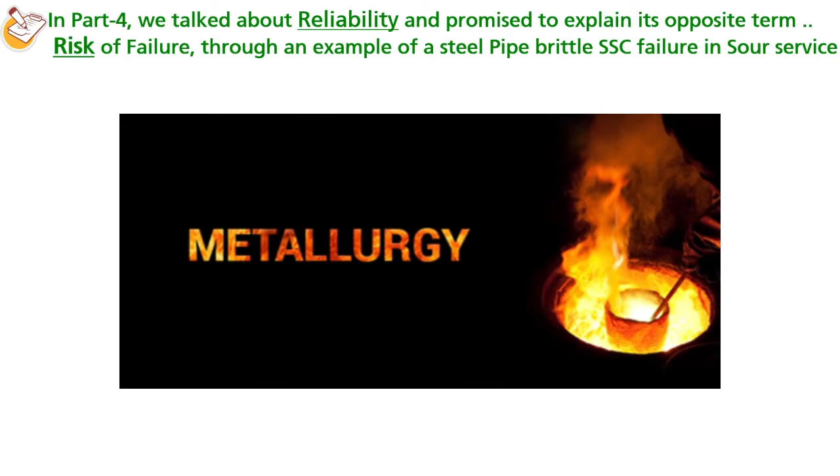But before we talk about such risk of SSC failure and explain risk in general, which is the main topic of this part, and since I promised to explain such a specific metallurgical failure risk in oil and gas industry, let me first explain some metallurgical terms. So what is brittle failure? What is sulfide stress cracking failure? And what is sour service?

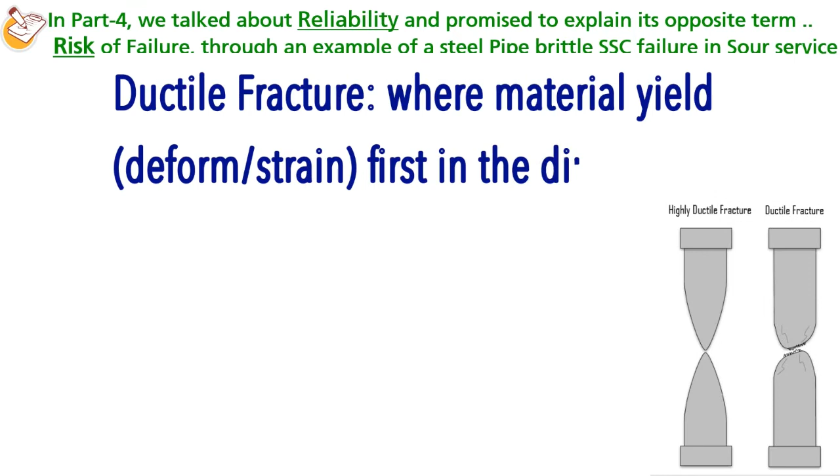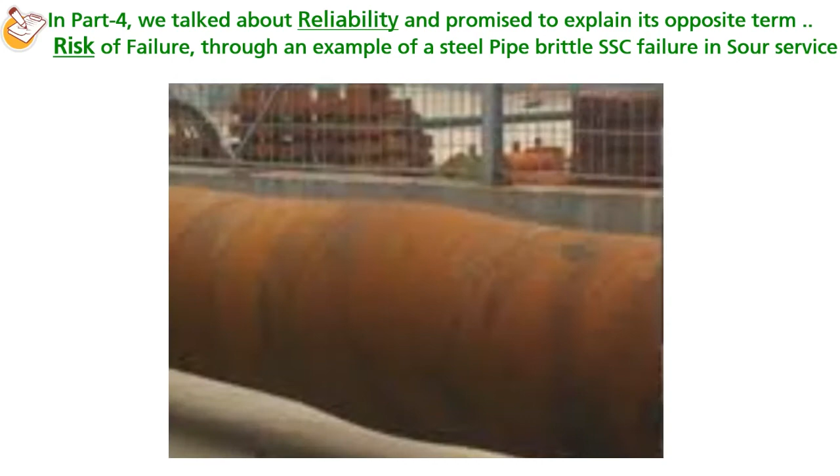Failures in most engineering steels can be either a ductile fracture, where material yields and deforms, straining first in the direction of the applied stress before complete breakage, giving a clear warning sign of plastic permanent deformation, like pipe bulging during a hydro test or steel bridge bending due to excess loads before complete rupture, which only happens after exceeding the ultimate tensile strength of the material, resulting in complete failure.

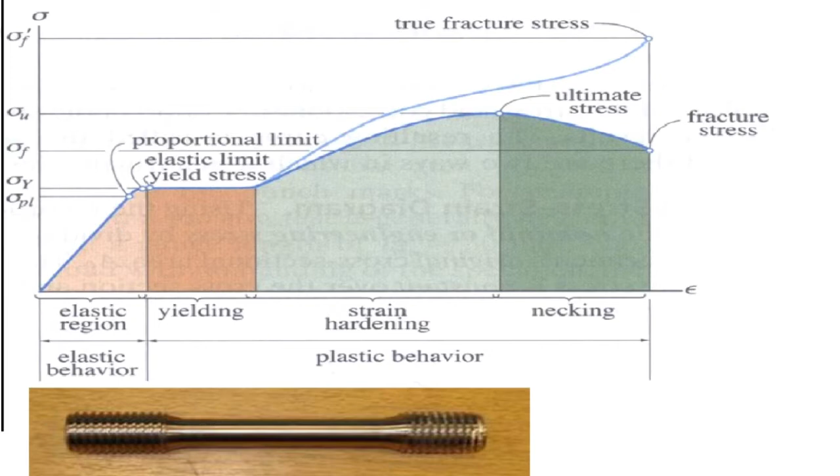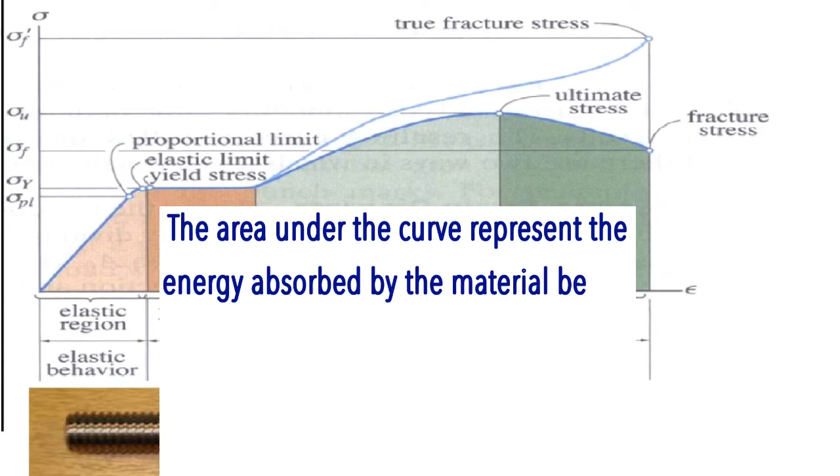This is expressed in the famous engineering stress strain curve, where the area under the curve of the plastic deformation part represents the energy absorbed by the material before failure, called toughness, an important property when we talk about brittle fracture, since brittle materials absorb least energy before failure or fracture.

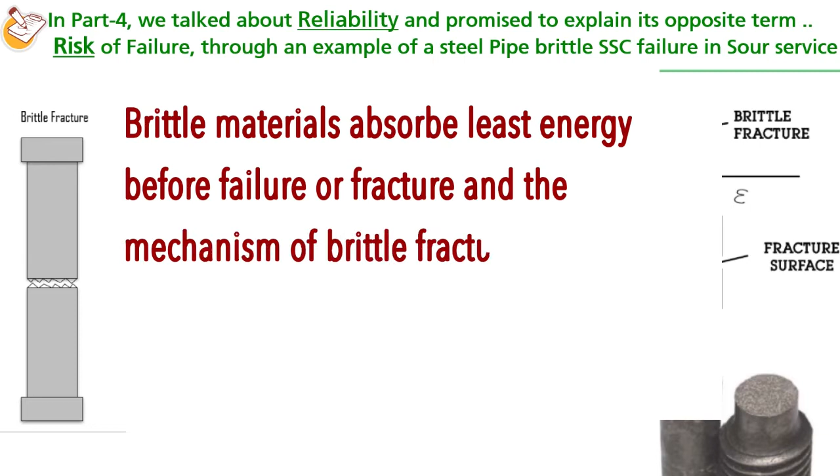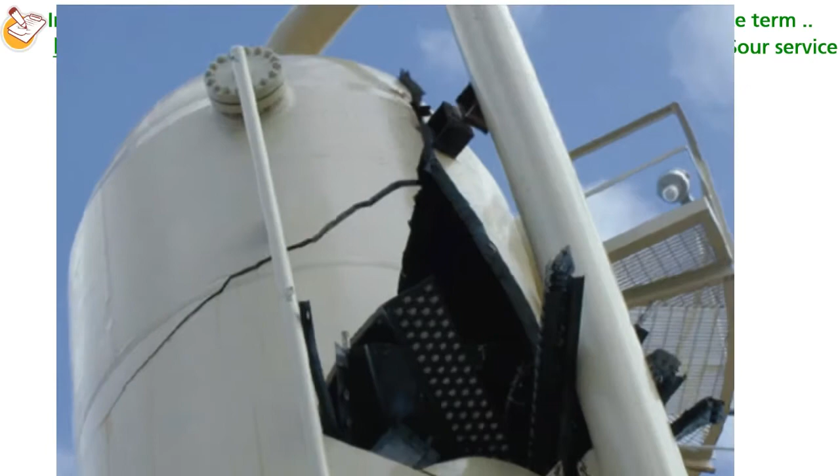The mechanism of brittle fracture is always associated with sudden breakage and fracture at lower stress level than normal ones, and this sudden nature of the failure, without any visible warning signs of deformation, results in losing the chance to do any preventive actions to avoid the failure and its catastrophic consequences.

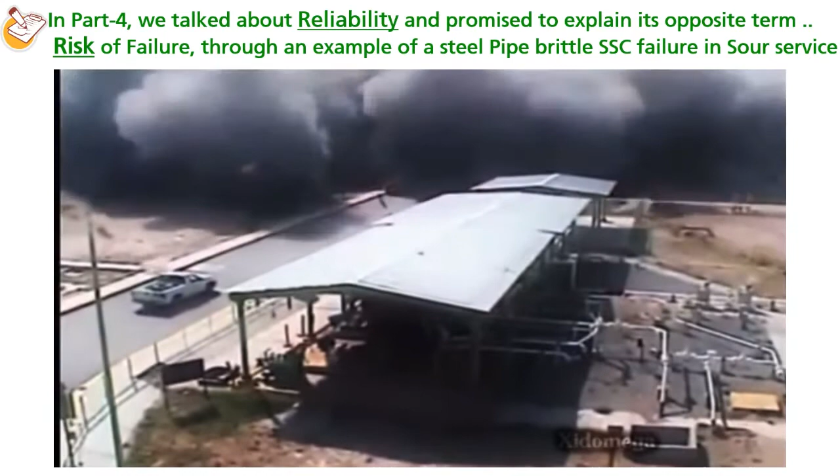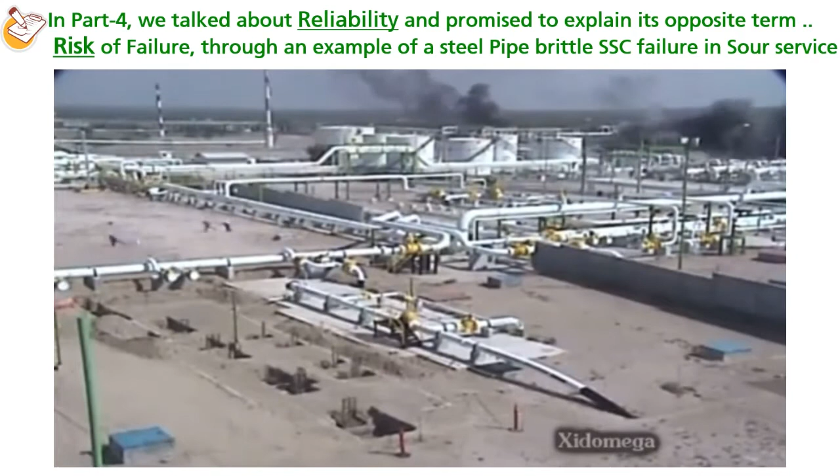Just to know the impact of brittle fractures: in 2007 in China only, 257 cases of accidents of special equipment occurred, which caused 325 deaths and 285 injuries, and more than half of these accidents were caused by brittle fracture.

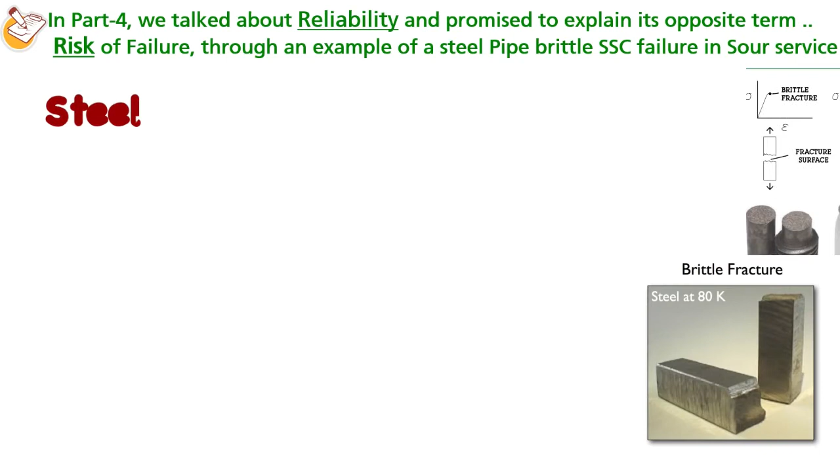But what can make material fail in such a brittle mode? Well, some causes can be that the material itself has problems, like high sulfur, high phosphorus levels, and might have high oxide levels, like in some old steels that were semi-killed steels, meaning not fully deoxidized to remove such oxides.

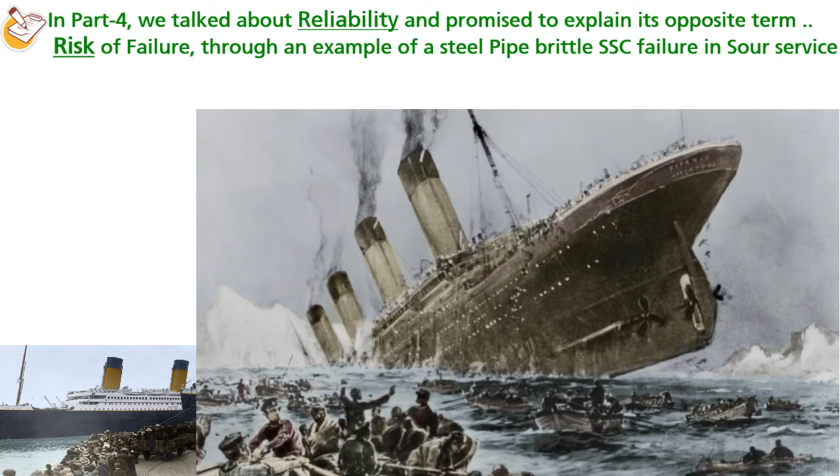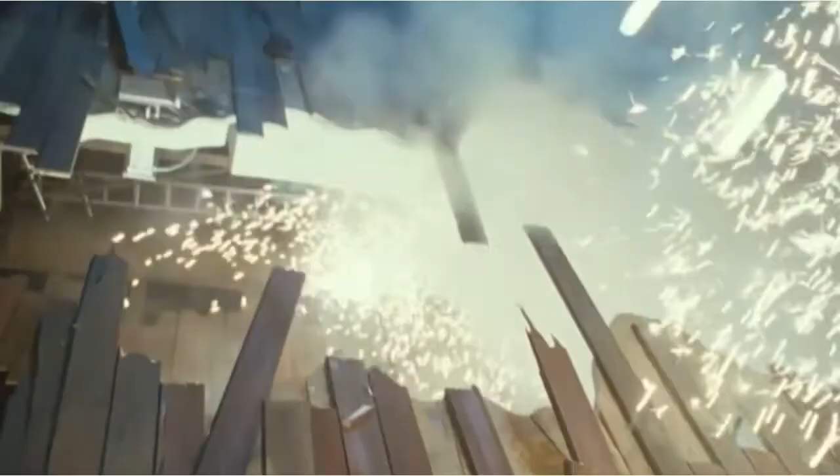The most famous disaster from brittle fracture due to this type of steel, combined with low temperature and impact load, is the famous 46,000-ton Titanic steamship disaster in 1912, with 2,227 passengers and crew aboard, where complete brittle fracture took place in the hull after striking the iceberg at high speed with its side. It was after this collision the disaster started, where the very low water temperature increased the steel brittleness.

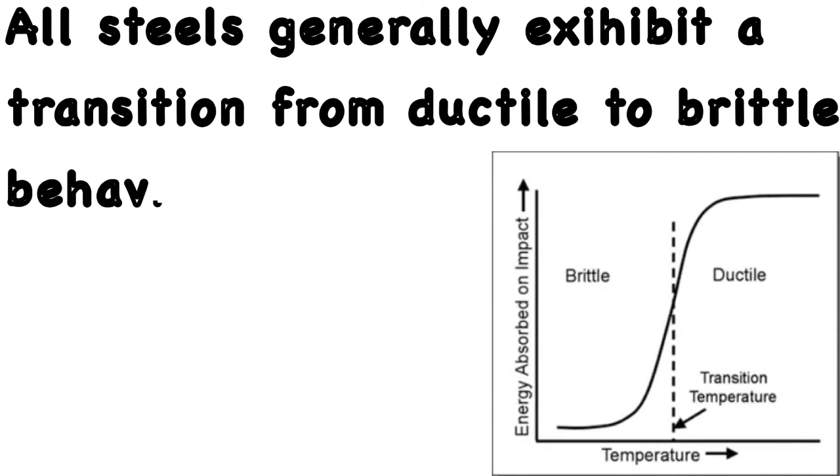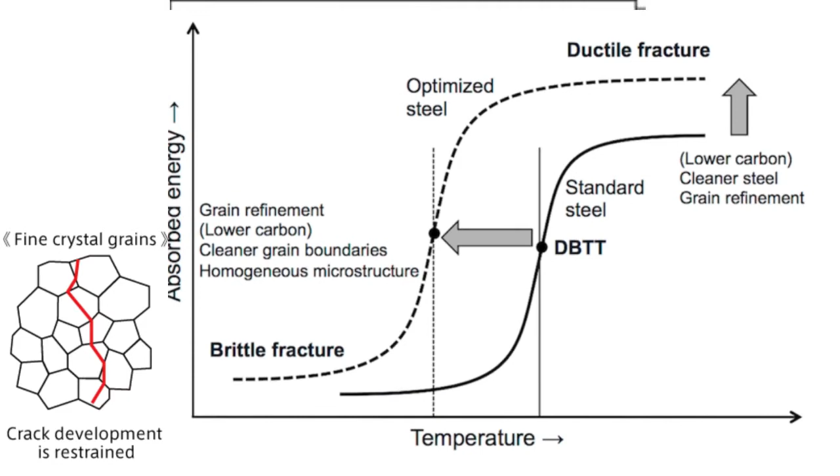All steels generally exhibit a transition from ductile to brittle behavior at a certain low temperature, DBTT, where fracture behavior follows a sudden cleavage mode. For modern fine-grained tough steels, DBTT, ductile brittle transition temperature, can go down to minus 100 degrees centigrade. But what is fine-grained steel, and why is it tough steel that can resist cracking and failure at such low temperature and impact load?

In order to answer this question, I need to give a brief and general explanation of some physical metallurgy basics. I apologize for the complexity this can generate for non-metallurgists. I'll try to simplify as much as possible.

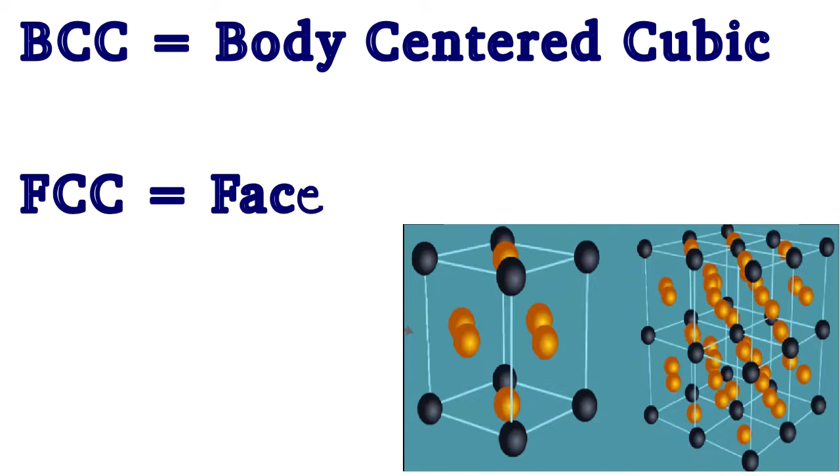Steel is mainly an alloy of iron and carbon, and when it solidifies or crystallizes, its atoms arrange themselves in a unique symmetrical crystalline structure, BCC body-centered cubic or FCC face-centered cubic, referred to as steel's allotropic form.

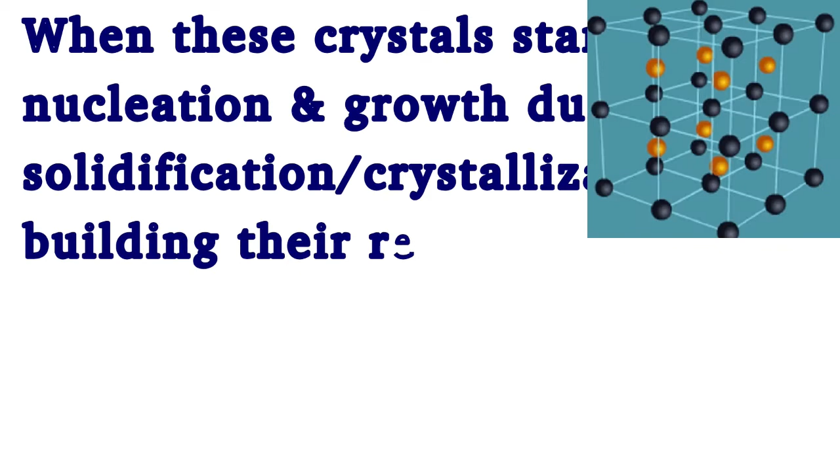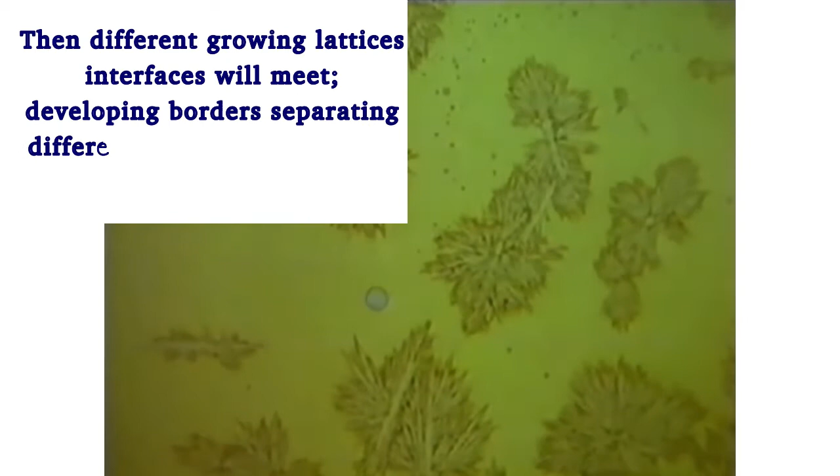When these crystals start nucleation and growth during solidification and crystallization, building their repeated symmetrical unit cells, called lattice, growing in all directions, different growing lattices interfaces will meet, developing a border separating different growing lattices and stopping further growth. So these crystallized lattices are grains, and the separating borders between them are grain boundaries.

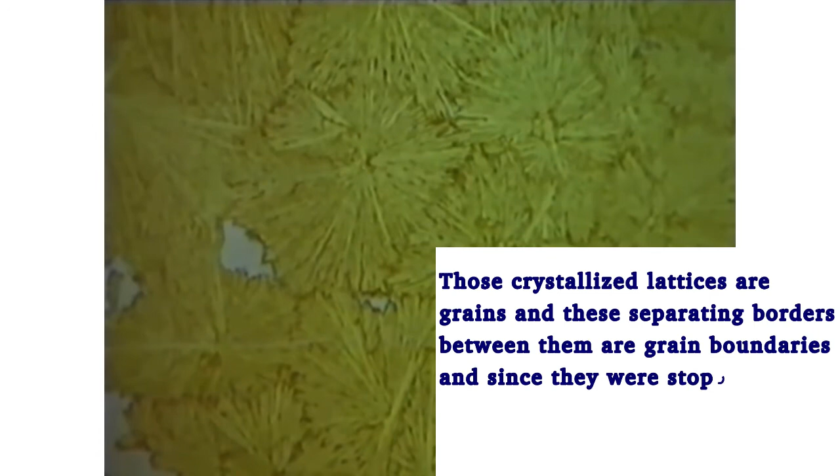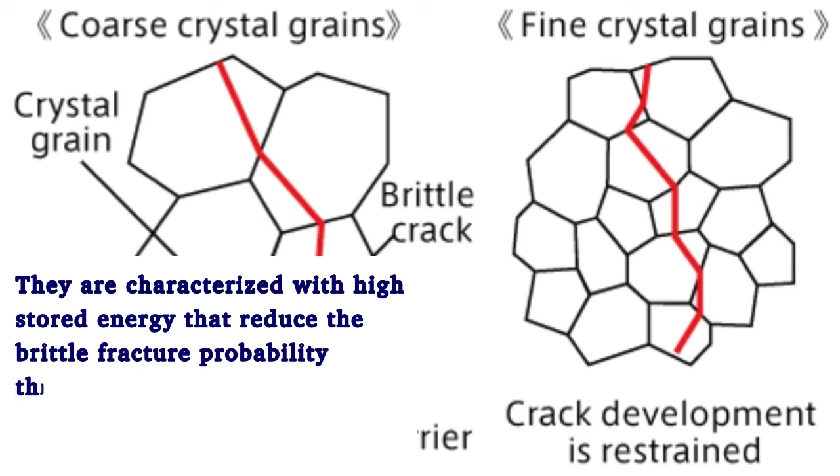Since they were stopped against certain growing force inertia, they are usually stronger than grains and characterized with high stored energy. That reduces the brittle fracture probability through resisting dislocation movement and crack propagation at low and normal temperature.

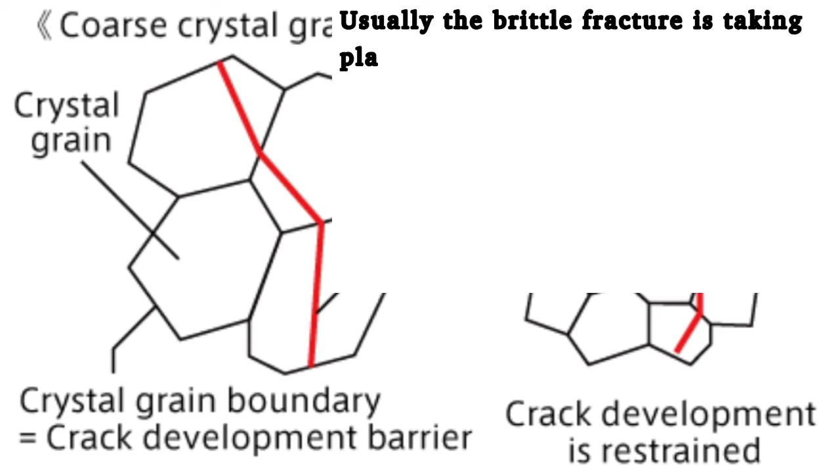So usually brittle fracture takes place in brittle materials by fine crack propagation through the grains themselves, called transgranular cracking, taking place suddenly and rapidly through separation across well-defined crystallographic planes.

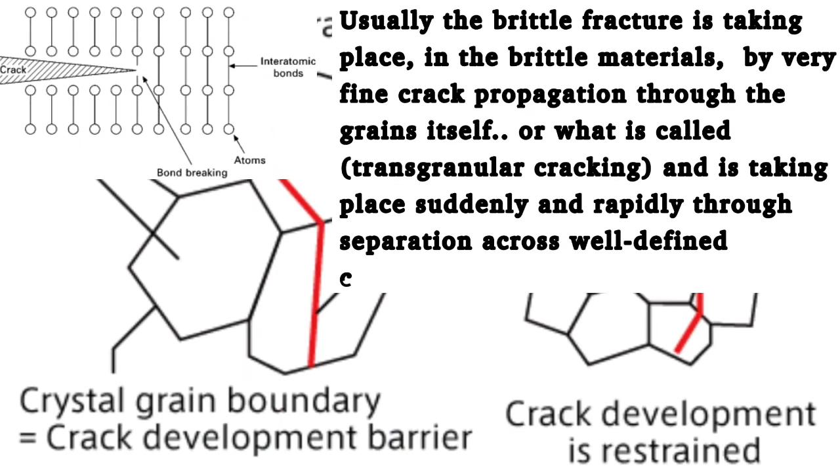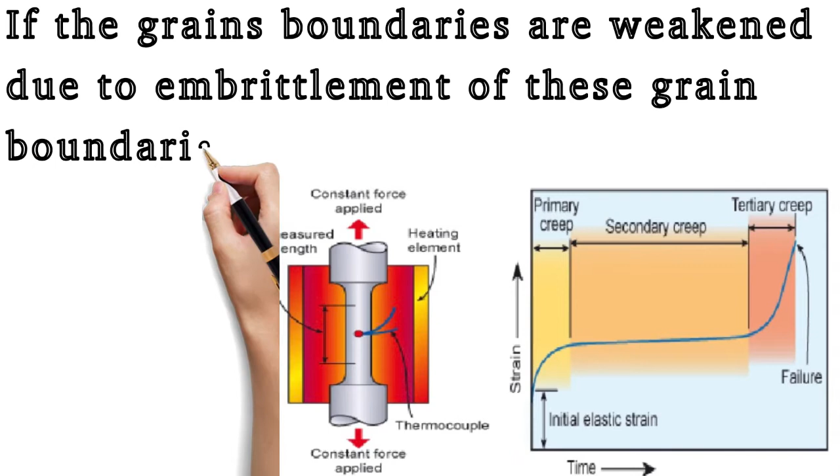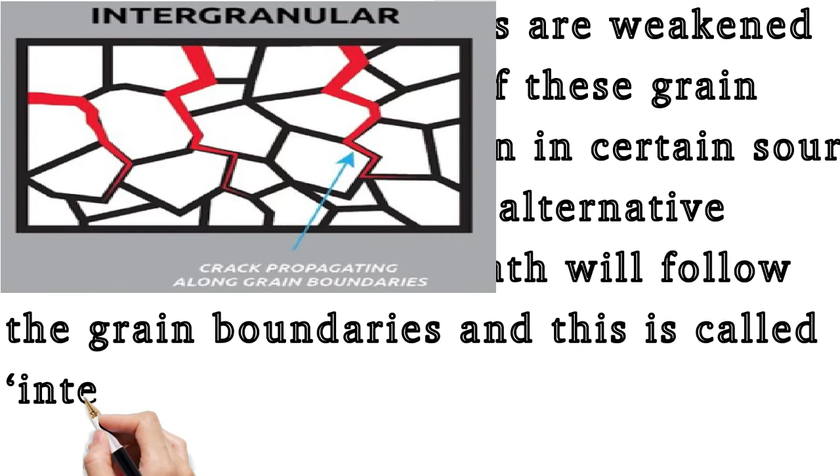However, if the grain boundaries are weakened, like in case of working above a certain high temperature called creep temperature, or in case of embrittlement of these grain boundaries by hydrogen in certain sour service conditions, the alternative fracture propagation path will follow the grain boundaries. This is called intergranular fracture, and this is a typical mechanism of sulfide stress cracking failure.

But how can we evaluate the risk that a high-strength low-alloy steel pipe will fail with the SSC mechanism in a sour service condition? And what is actually meant by sour service?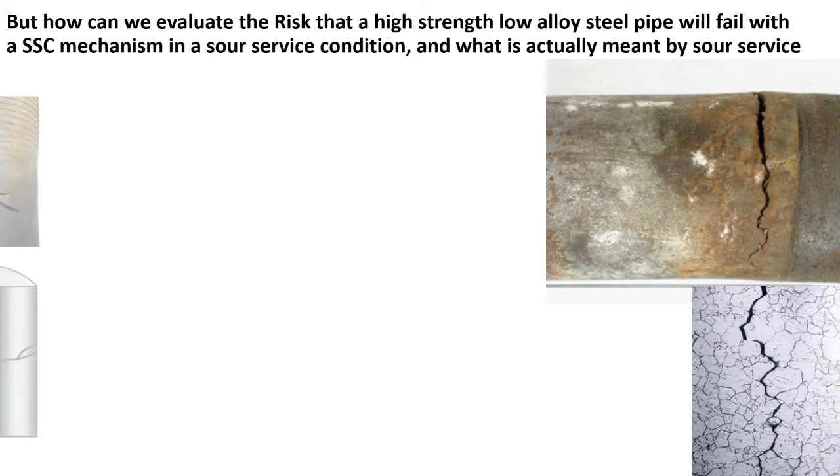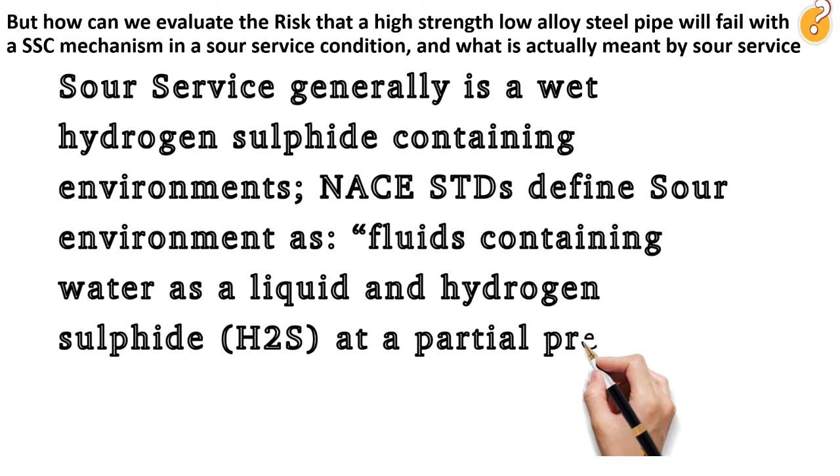Now, sour service generally is a wet hydrogen sulfide containing environment. NACE standards define sour environment as fluids containing water as a liquid and hydrogen sulfide at a partial pressure above 0.05 psi, which may cause sulfide stress cracking of some steels. From a health hazard and risk point of view, we should know that H2S gas is a highly toxic gas and can be fatal at certain exposure levels.

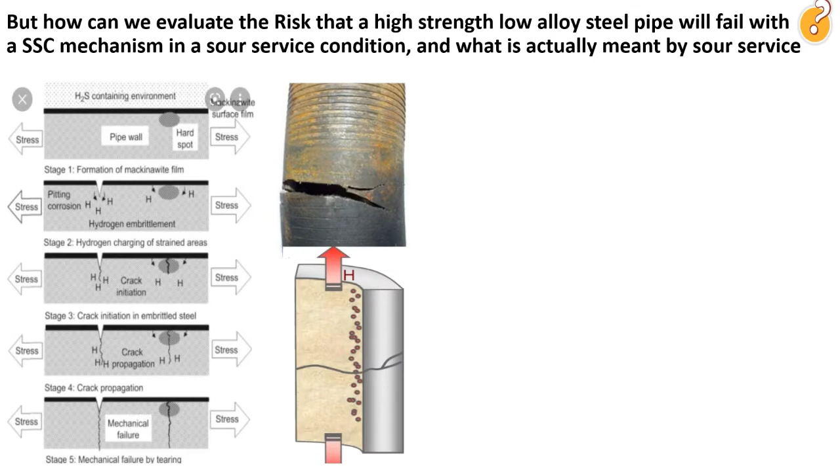H2S is also very detrimental to high-strength steels and can cause initiation of cracks at the steel surface, mainly through a hydrogen embrittlement mechanism, when it exists in a certain humid hydrogen sulfide environment, especially if combined with certain stress loads. This is why it is called sulfide stress cracking.

SSC is a catastrophic failure as it results in a brittle fracture, and it can occur at stresses falling within the range of typical design stress.

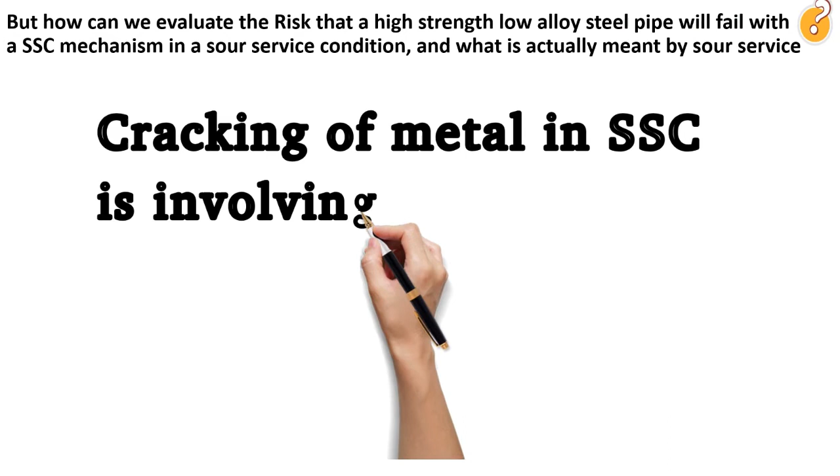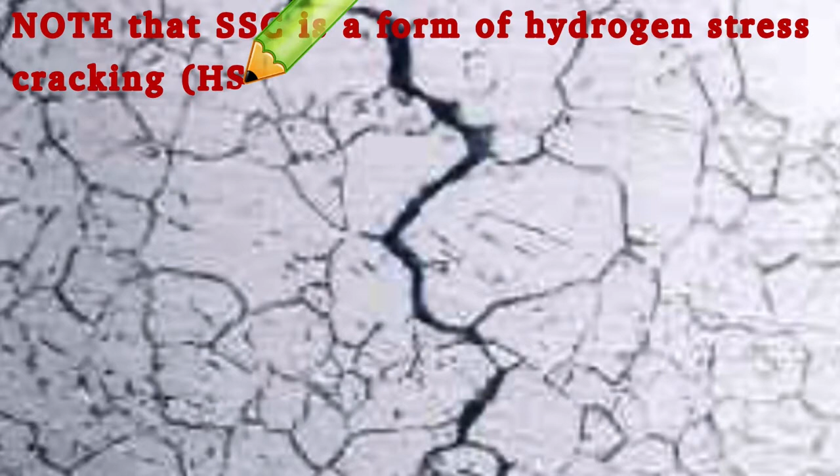As per standards covering these types of services, like NACE MR0175 and ISO 15156, cracking of metal in SSC involves corrosion and tensile stress, residual and/or applied, in the presence of water and H2S. Note that SSC is a form of hydrogen stress cracking, HSC, and involves embrittlement of the metal by atomic hydrogen produced by acid corrosion on the metal surface promoted by the presence of sulfides. The atomic hydrogen can diffuse into the metal, reduce ductility, and increase susceptibility to cracking, especially in high-strength metallic materials.

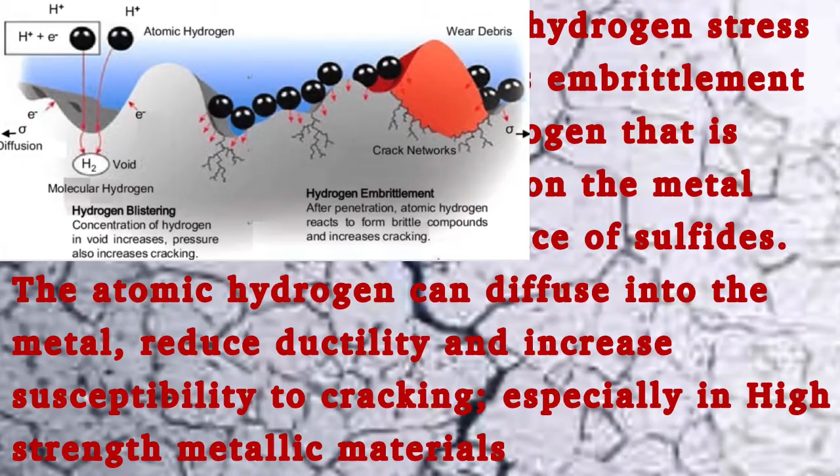Now, after this quite complex part, let's try to apply what we learned in the last part about reliability.

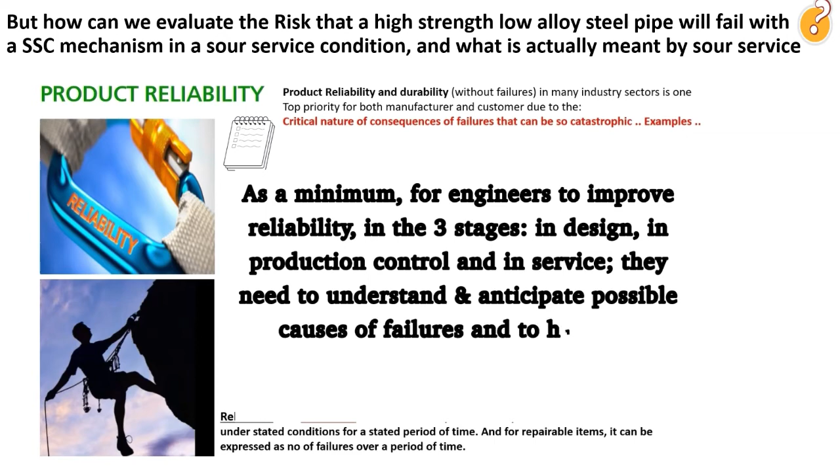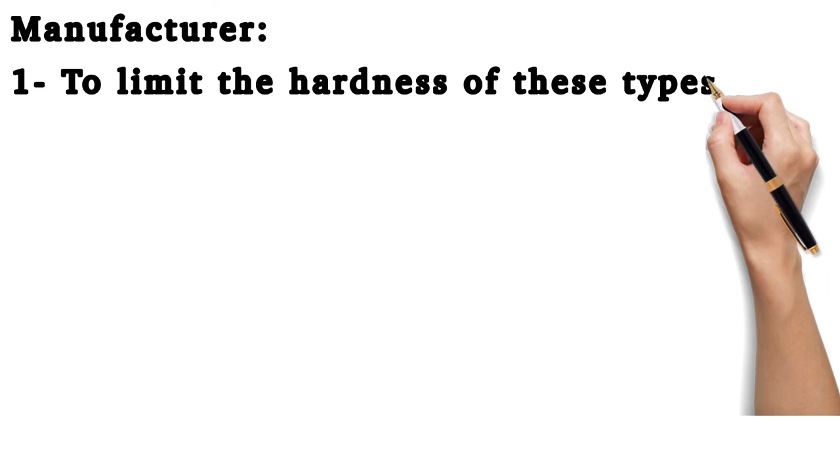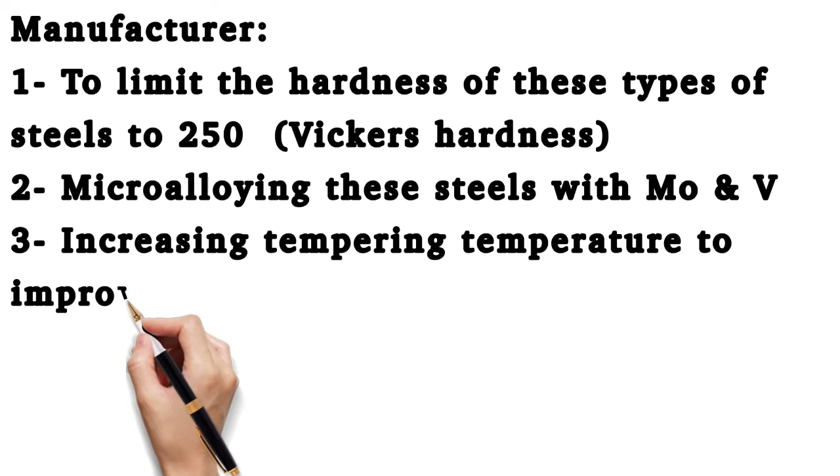In order to reduce the risk of failure by SSC, manufacturers can reduce the probability by increasing product engineering reliability as follows. First, since high-strength steels are more susceptible to SSC than low-strength steels, it is common industry standard to limit the hardness of these types of steels to 250 Vickers hardness. Then, microalloy these steels with molybdenum and vanadium, increase tempering temperature to improve the morphology of the steel, grain size, shape and structure, and ensure the steel surface is free from defects or stress risers.

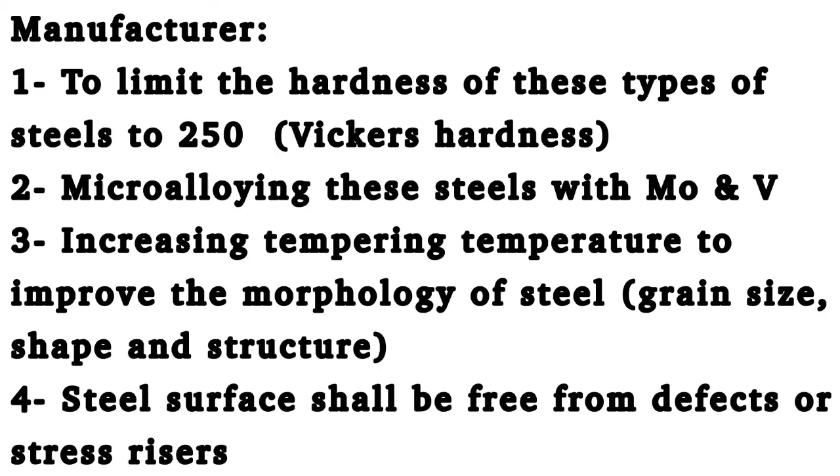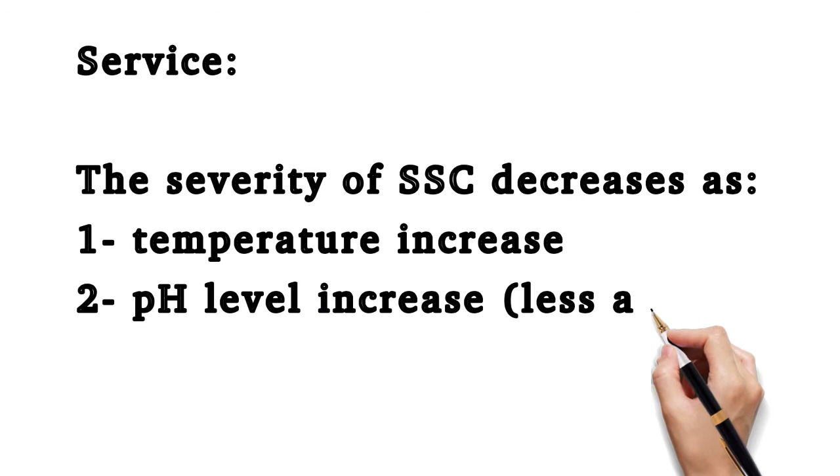Now, how to reduce the risk of failure from a service point of view, by the end user. We should know that the severity of SSC decreases as temperature increases, pH level increases (less acidity), H2S concentration decreases, and service stress levels decrease.

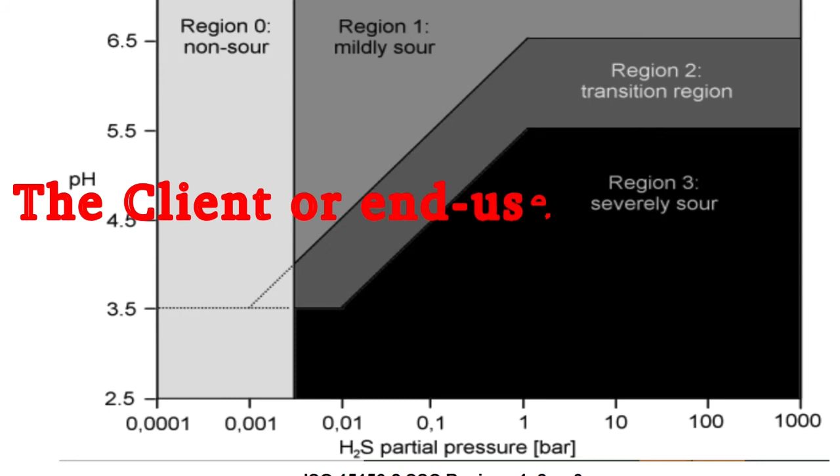But since most of these conditions are somehow difficult to control when we actually run a production tubing downhole into a sour oil well with certain H2S pressures and under certain tension stress levels, the client or end user's main responsibility is to correctly select the steel for the right service severity level or region, or reduce the severity if possible.

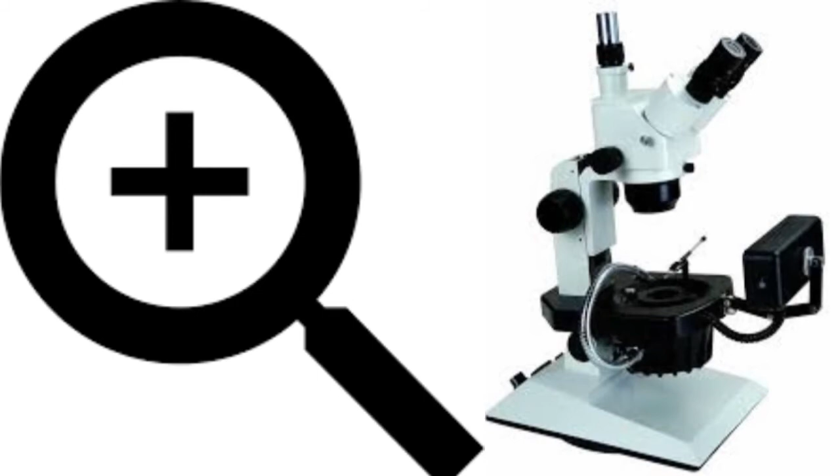Finally, after this relatively detailed and zoomed-in explanation of the possible causes for this specific failure risk, and the ways to prevent it from the manufacturer side and the client end-user side, let us now zoom out and try to see the whole picture of almost everything we learned so far.

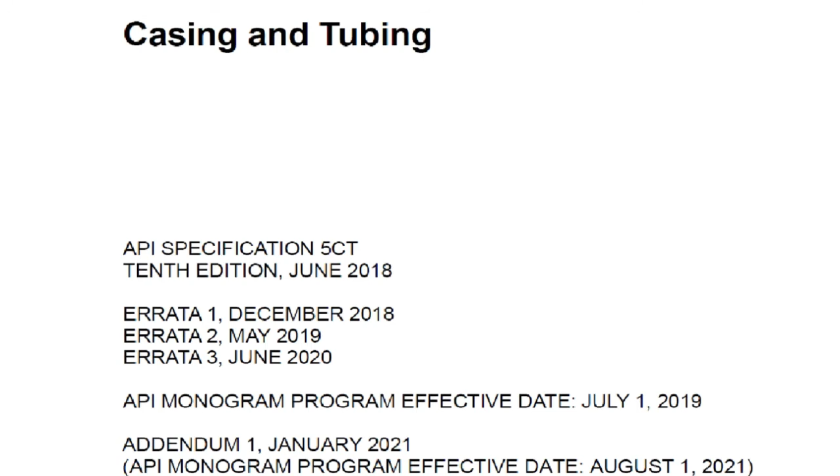Let's look at one example from an international standard: the American Petroleum Institute Standard, API 5CT, which covers manufacturing of steel pipes used in oil and gas upstream services. Let's take the example of one steel grade intended to be used, as per this standard, in sour service.

The API standard makes it very clear to the end user, the purchaser of these sour pipes, that it is their responsibility to select the right product grade for the right sour service severity level, and that the manufacturer's full and consistent compliance with this standard does not guarantee the reliability of this grade in such specific severe sour conditions. Let's read this quoted clause, 5.1, together and focus carefully on the underlined part.

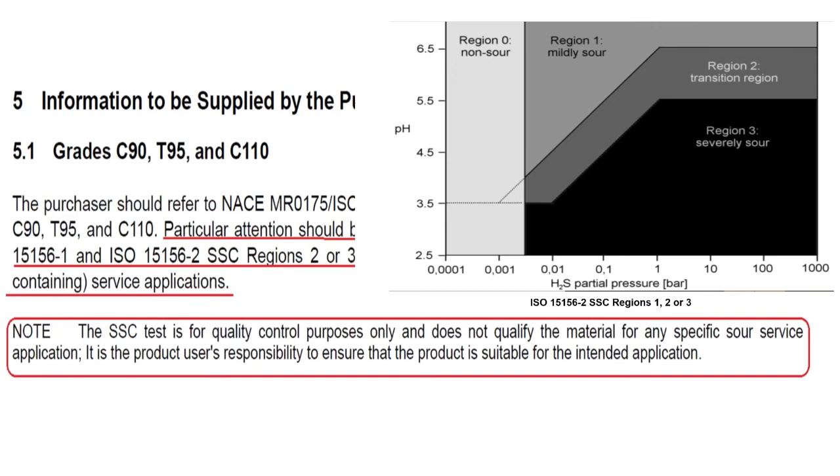Particular attention should be given to the application of grade C110 in NACE MR0175, ISO 15156-1-2, SSC regions 2 or 3, as this material is not suitable for all sour hydrogen sulfide containing service conditions. Note: the SSC test is for quality control purposes only and does not qualify the material for any specific sour service application. It is the product user's responsibility to ensure that the product is suitable for the intended application.

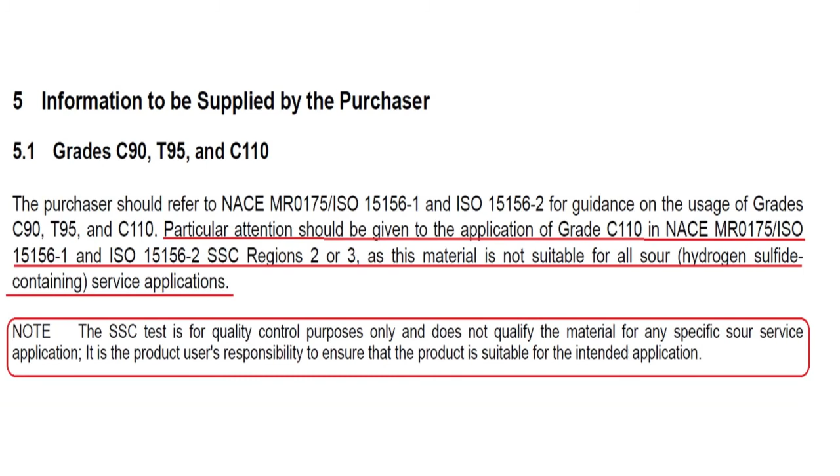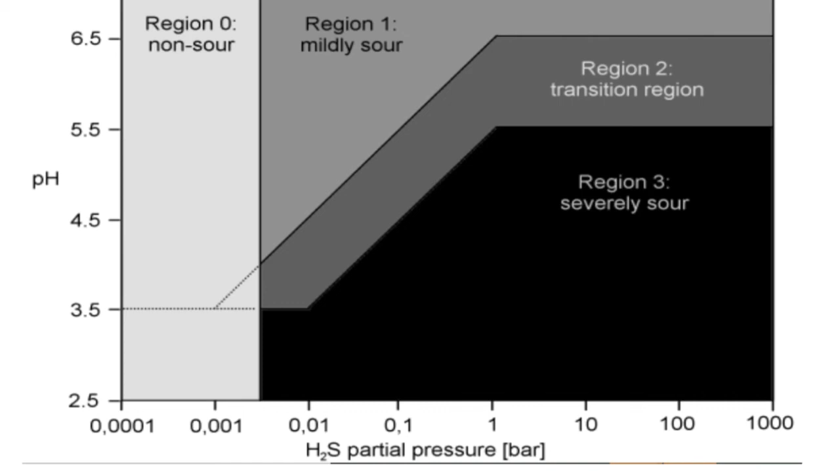We can see in this graph, quoted from ISO 15156-2 standard, the SSC regions 2 and 3 that were mentioned in the previous quoted clause from API 5CT standard. Regions 2 and 3 are characterized by higher H2S partial pressure combined with lower pH values, meaning higher acidity.

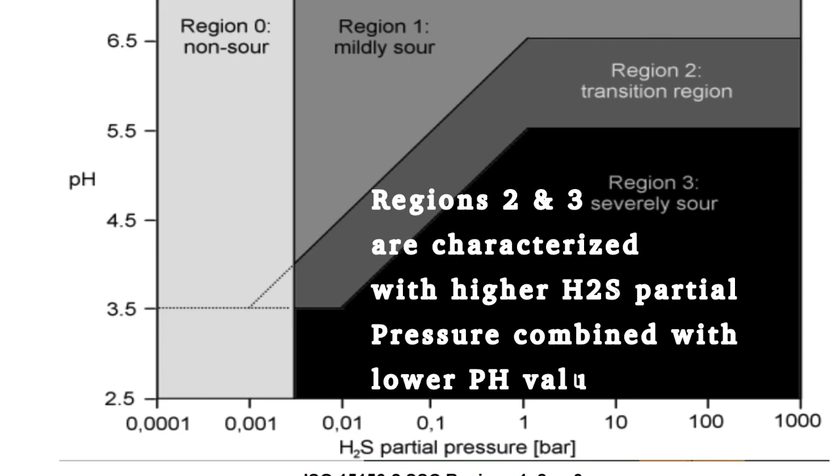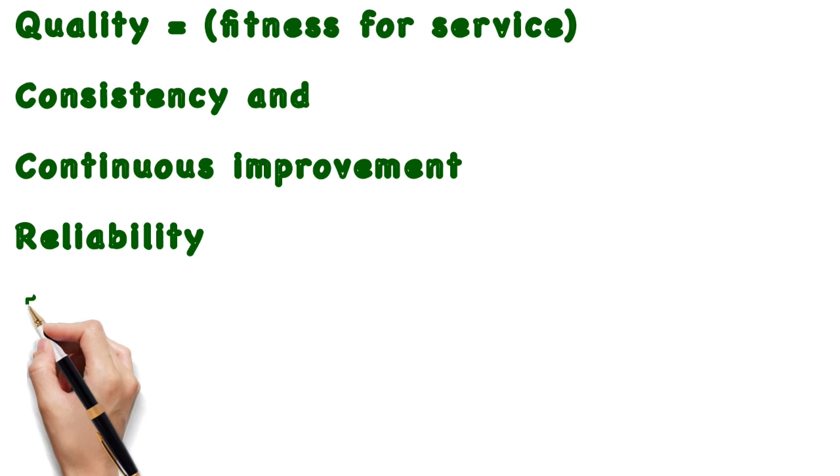This example summarizes almost everything we have learned about the definition of quality as fitness for service, consistency, and the importance of continuous improvement to achieve reliability, and the combined responsibility of manufacturer and end user to achieve that, especially when we deal with risks. This is what we will learn in this part, which has just started.